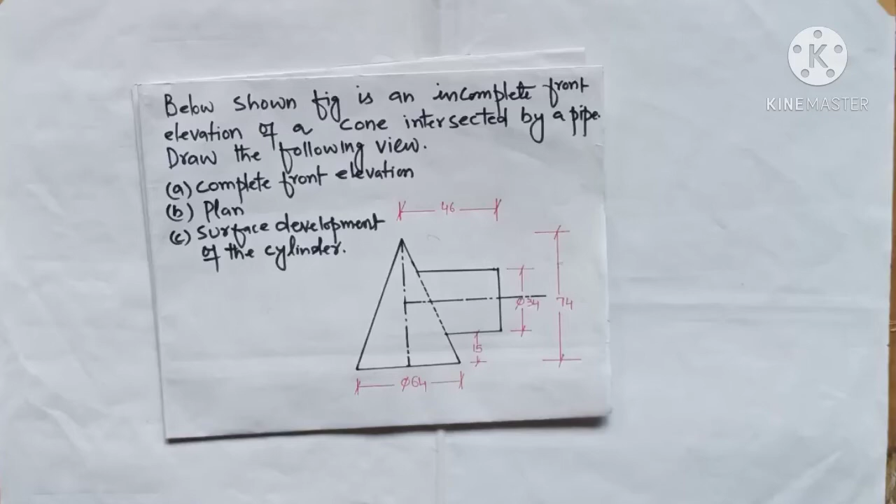So shown below is an incomplete front elevation of a cone. So this is the incomplete front elevation of a cone intersected by a pipe. So this portion is the pipe part which is intersected with the cone, and we have to draw the complete front elevation.

So we have to complete the front elevation, and the plan, that is the top view, we have to draw of this figure, and we also have to do the surface development of the cylinder. So we have to develop this cylindrical portion of the diagram. So this question is the combination of projection of solids and the development of surfaces. So let's start doing the question.

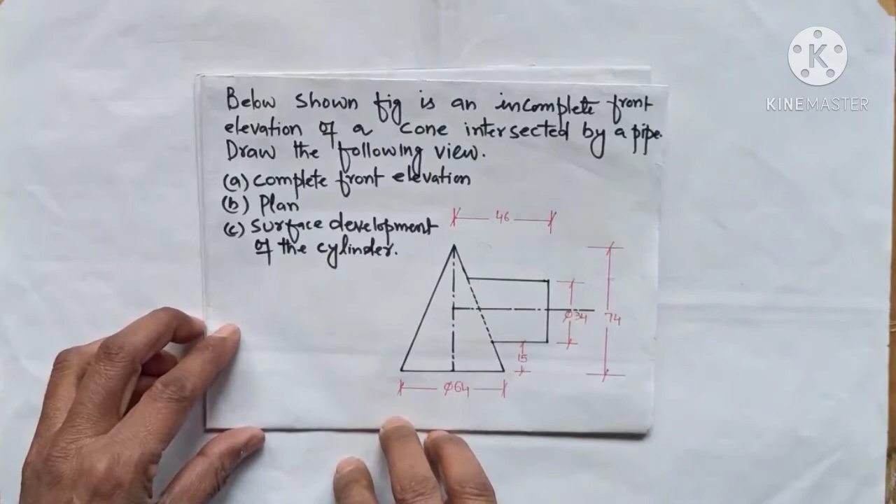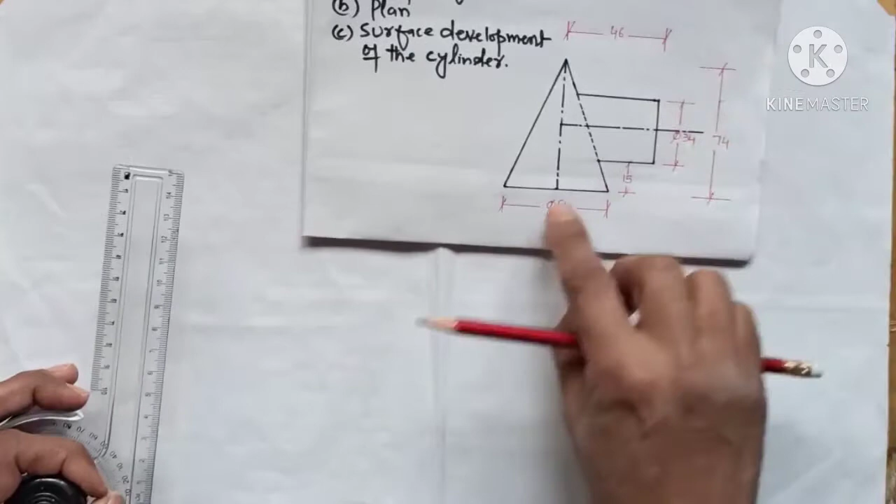So first I will draw the given figure again on this drawing sheet, then I will draw the top view of the diagram, then the last part will be drawn. So let's start drawing the first part. So as you know, this cone has a base circle, that is its base is 64 mm, having the dia of 64 mm.

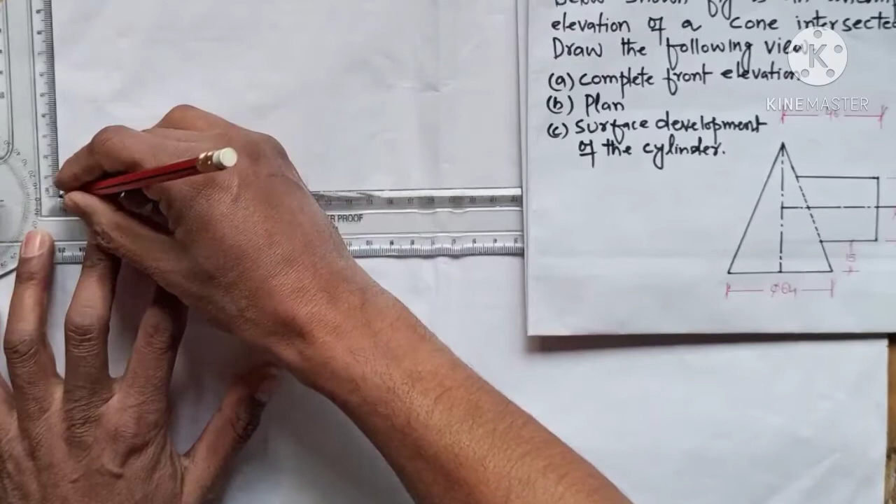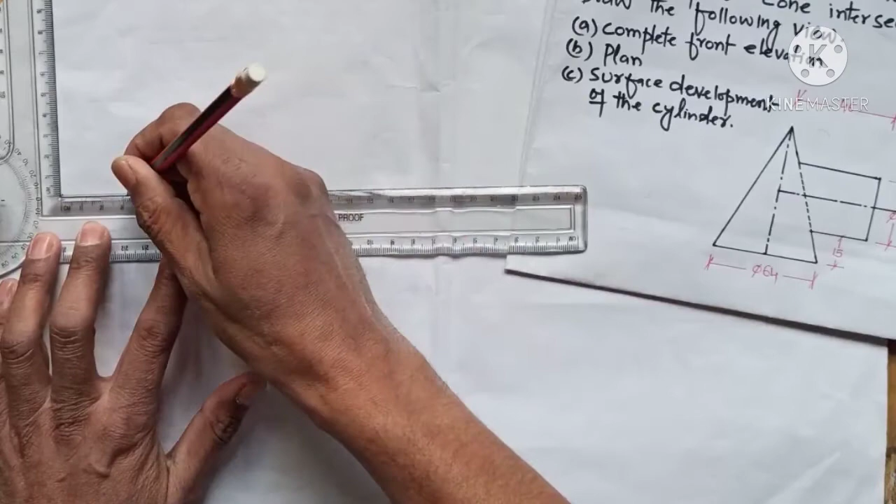So I will draw the 64 mm dia here. So 64 is this much. So I will draw a line. That line should be a very light line, my dear students. So I draw the 64 mm base of the cone. Then I will bisect it. So that is 32, this is the bisecting point. On the bisecting point, I will draw the axis of the cone.

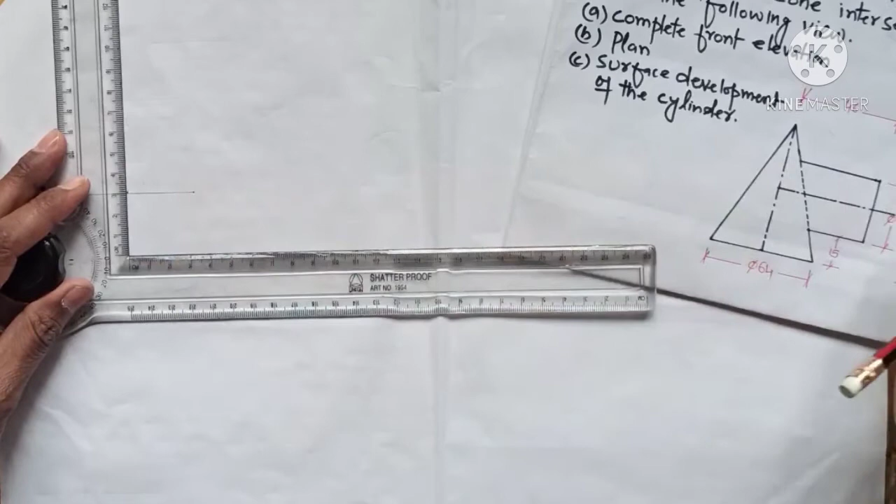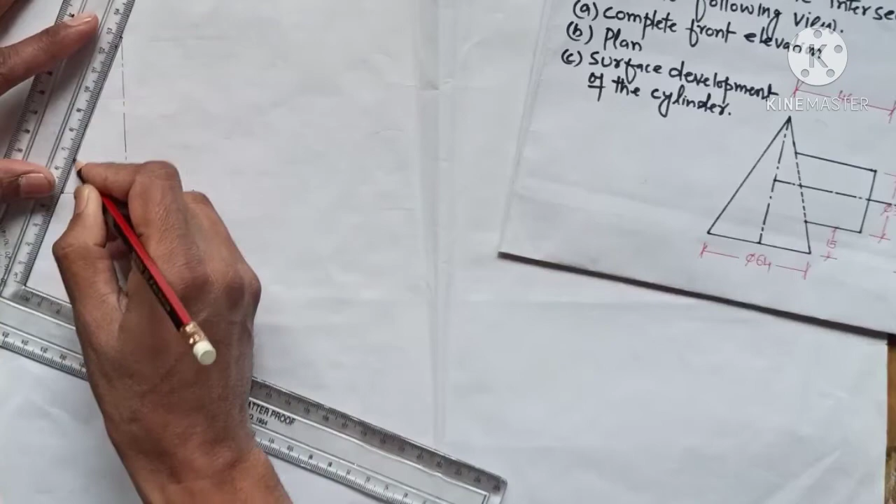That axis is how much? It has a height of 74 mm. So it is 10, 20, 30, 40, 50, 60, 70 and 74. So I will draw the central axis of the cone. Now next I need to connect these points with the apex with a light line initially. Again this needs to be connected with a light line initially.

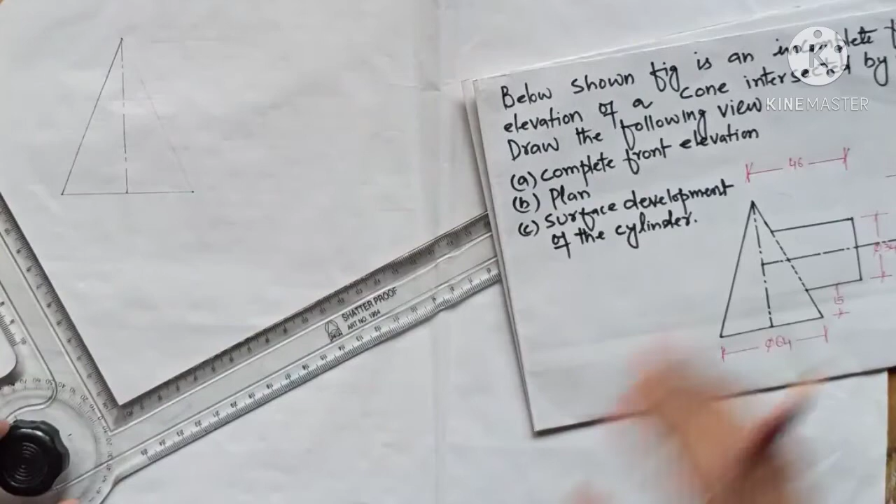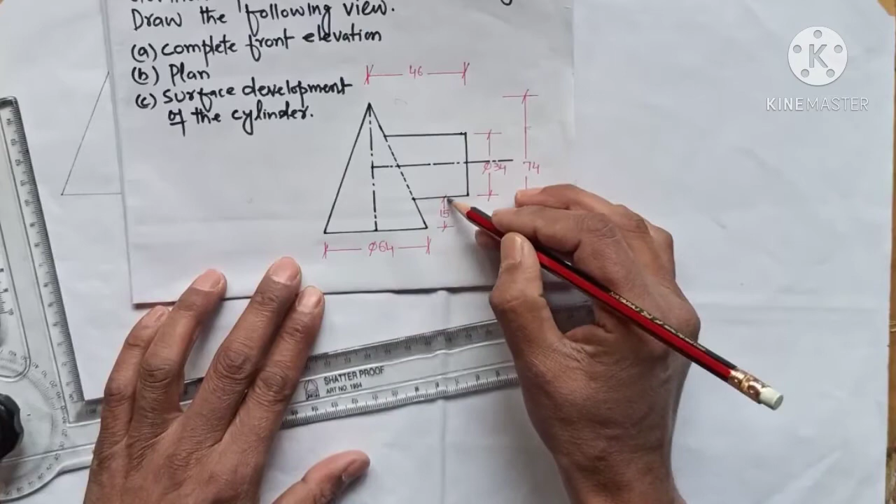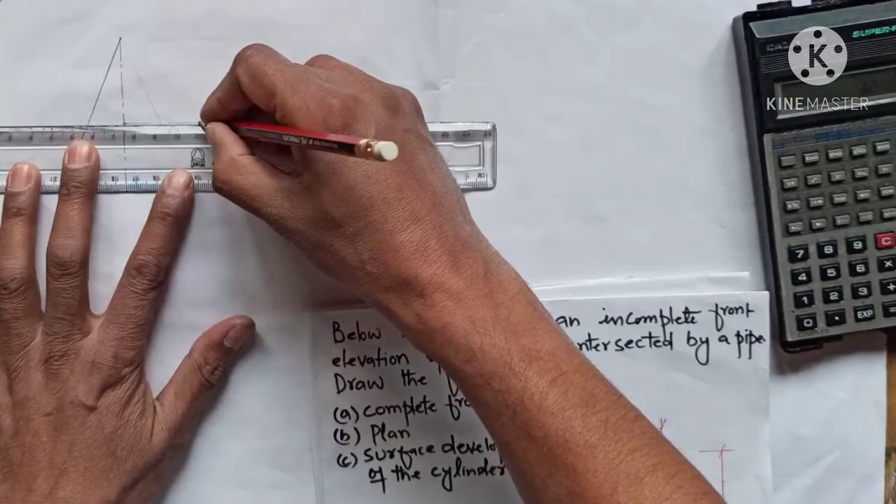Next I need to find out the center of this pipe, which is the cylinder. So it is half of this, that is 34 by 2, that is 17, plus 15, that is at a height of 32 mm. So from the base of the cone, I have to go 32 mm up. So this is the center. So I will draw a central axis of the pipe.

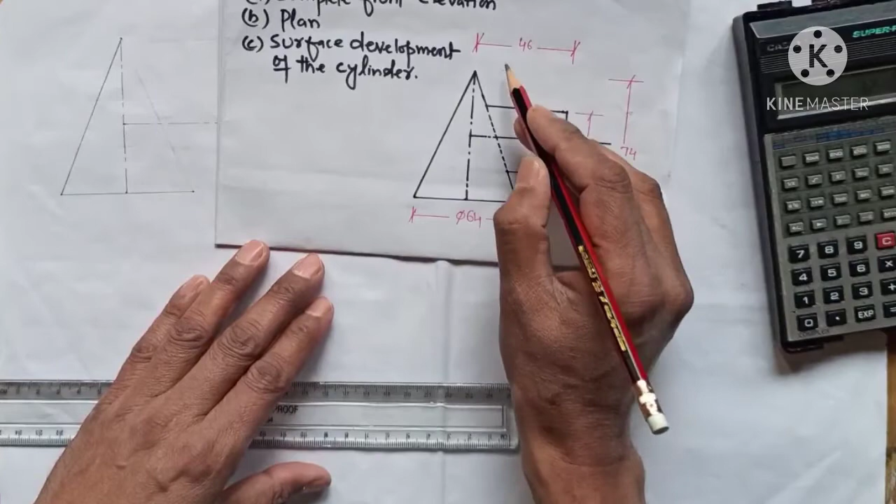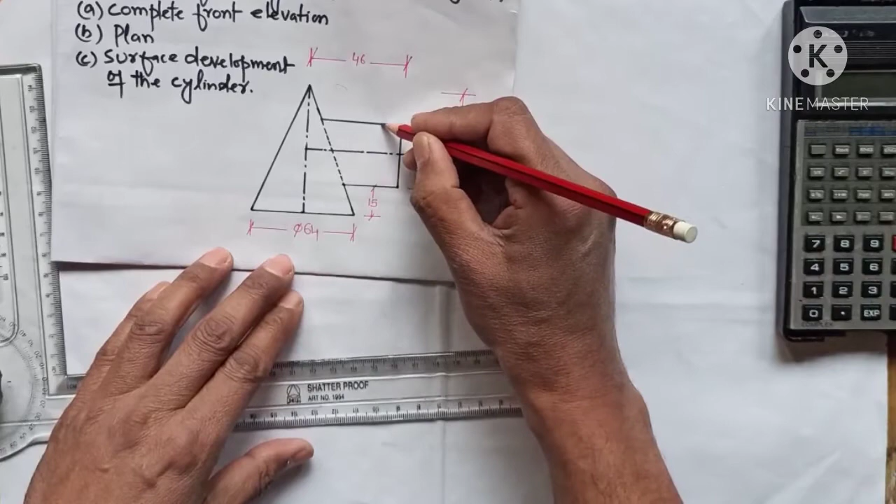Next, this is at a distance of 46 mm from the center. So I will measure 46 from here, it is this point. There I will draw a light line. And now the dia of this pipe is 34, that means 17 mm above and 17 mm below. So I will mark the 2 points on this line, 17 mm, this point, and here it is this point.

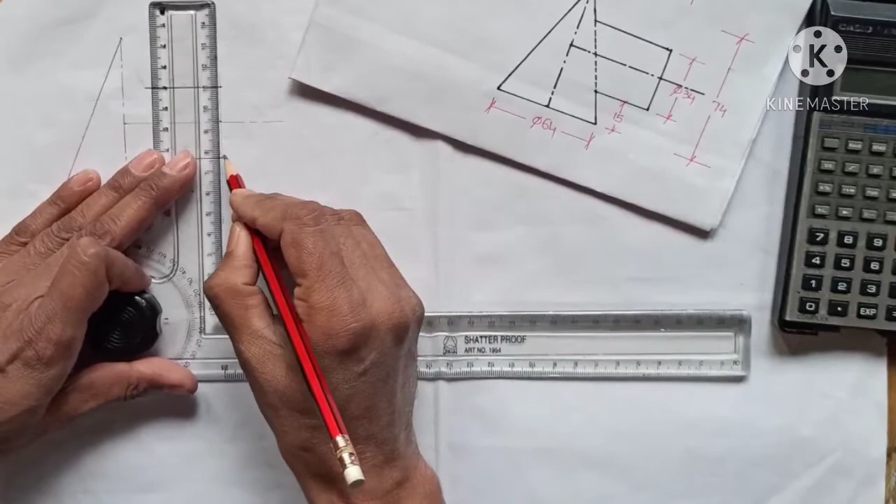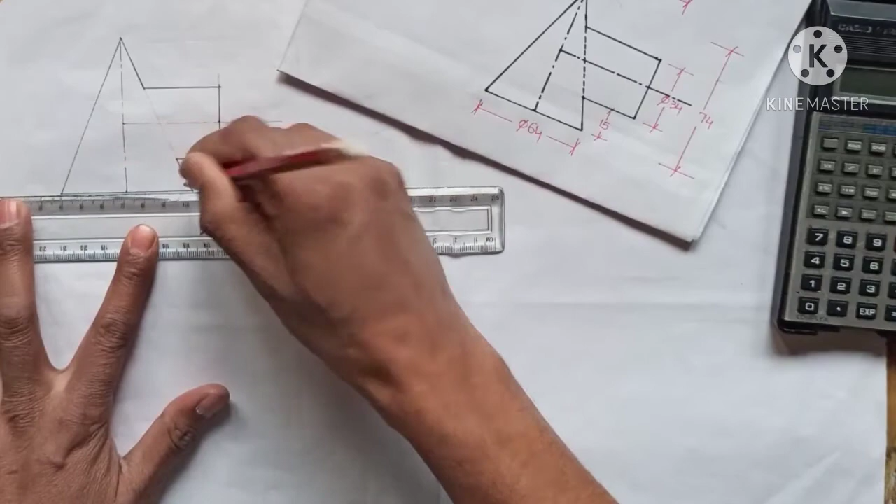Then join these points with the slant generator of the cone. Now the rest of the part can be made dark. I can make this dark, and join this as a dark line and this as a dark line. Okay, this is what was given in the figure, and as I said, this is the incomplete one.

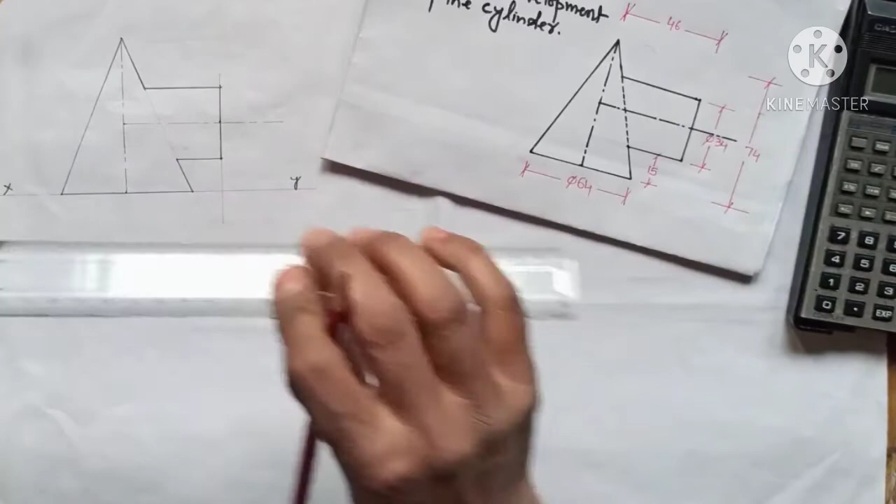So let's assume that this cone is resting on the ground, that ground is my xy line, so I will now draw the xy line. Now from the front elevation, I will draw the plan of it. For the plan, I will extend this central axis. Then I will draw a horizontal line on the central axis that will indicate the center. So I found out the center of the base.

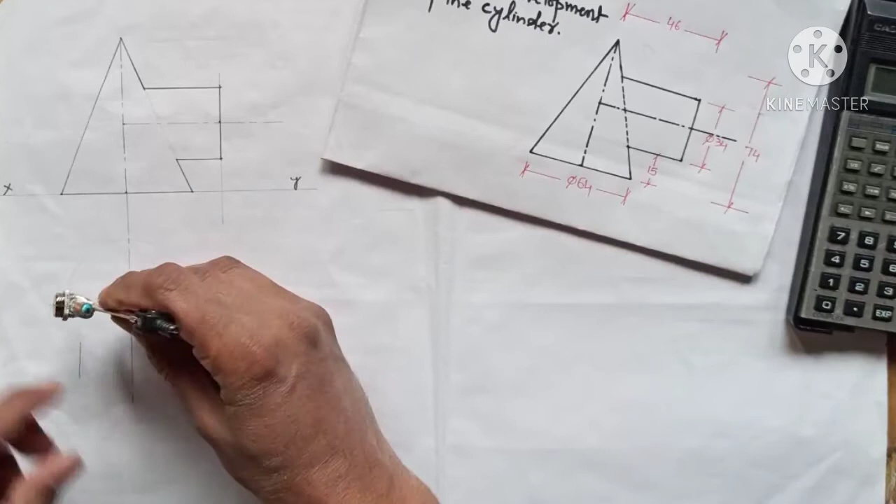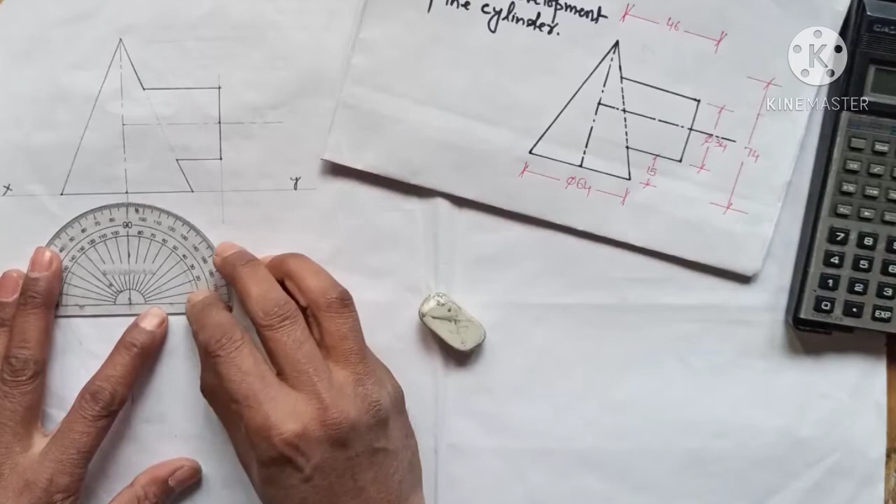Now I will measure here, this is half of the base. With this as center, I will draw a light circle. And this circle needs to be divided into 12 equal parts. Already 4 parts are there. So I will divide this circle into 12 equal parts, keeping the protractor at the center, giving points at 30 degrees, then 60, 90, 120, and 150.

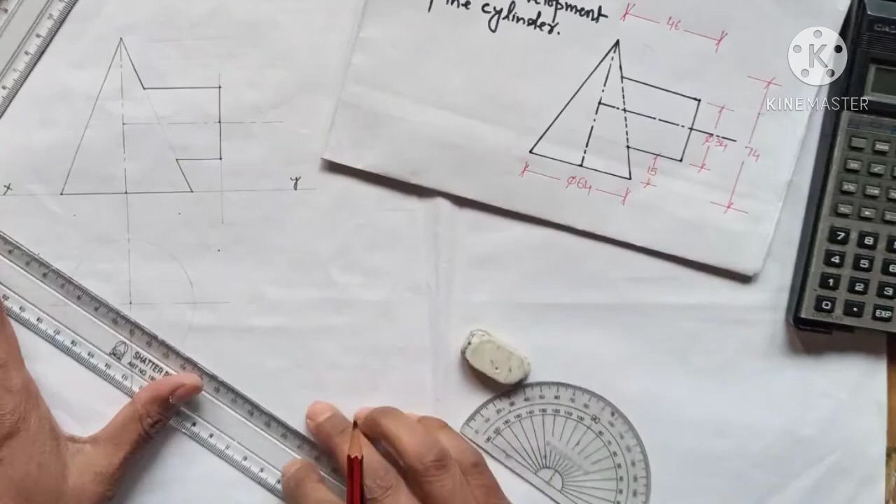So I'm dividing the base of the cone into 12 equal parts. Now joining this point and the center of the circle with a very light line. Same goes for the other points. Now these points need to be joined.

With a very light line. These are all construction lines, my dear students. This is how I have divided the base of the cone into 12 equal parts. So now naming them. Let's say this is 1, 2, 3, 4, 5, 6, 7, 8, 9, 10, 11, and this one is 12.

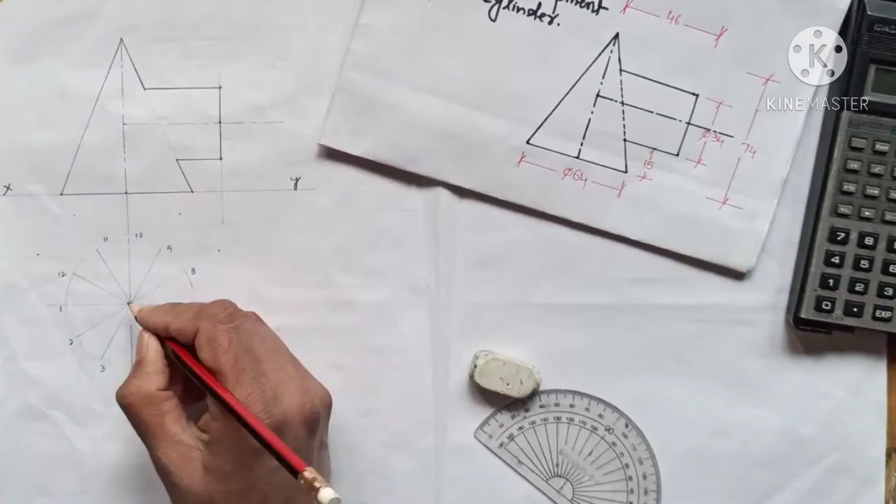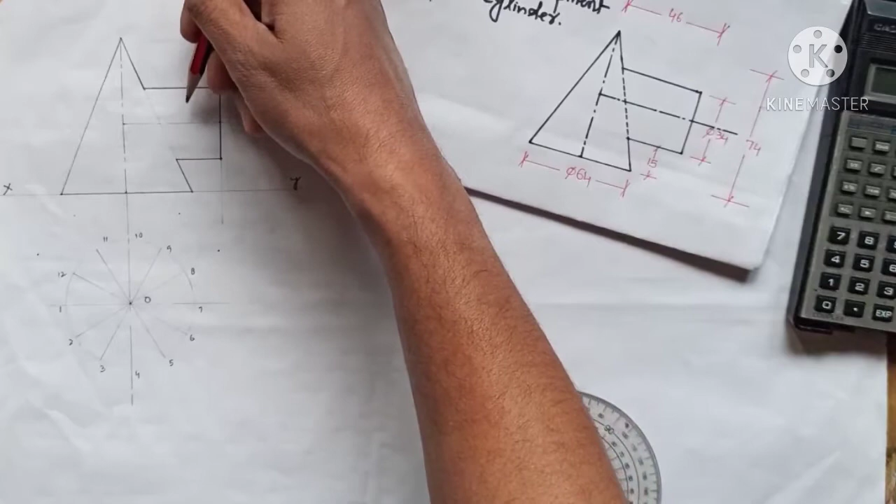What next? When I look at it from the top, I can find this apex. Let's assume this apex is 0. Fine. And when I look at it from the top, I can see this cylinder, having the dia of 34, which was given in the diagram. So what I have to do, I will produce this point with a very light line.

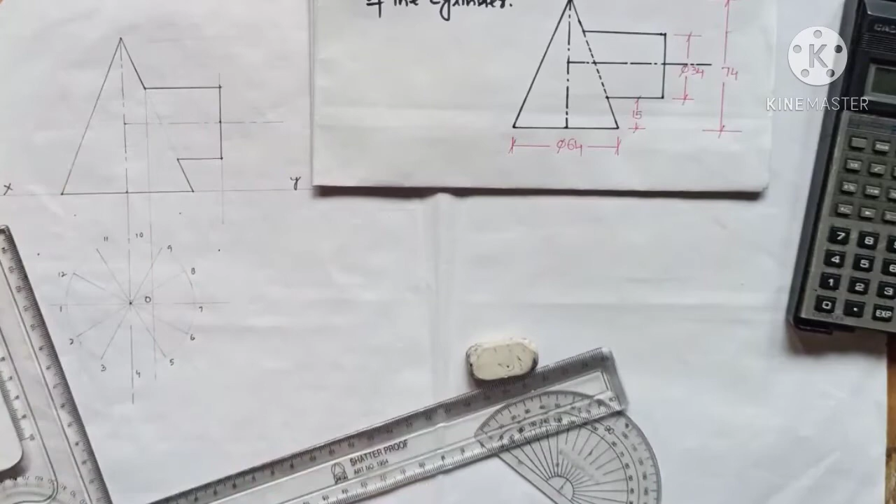Now next, I can also produce this point, the other end of the cylinder. Now let's assume this is the center of the cylinder or the pipe, and the dia of that is 34. That means we have to mark 17 mm above this line and 17 mm below this line in the front elevation. Fine. Now joining these points with a dark line up to this point.

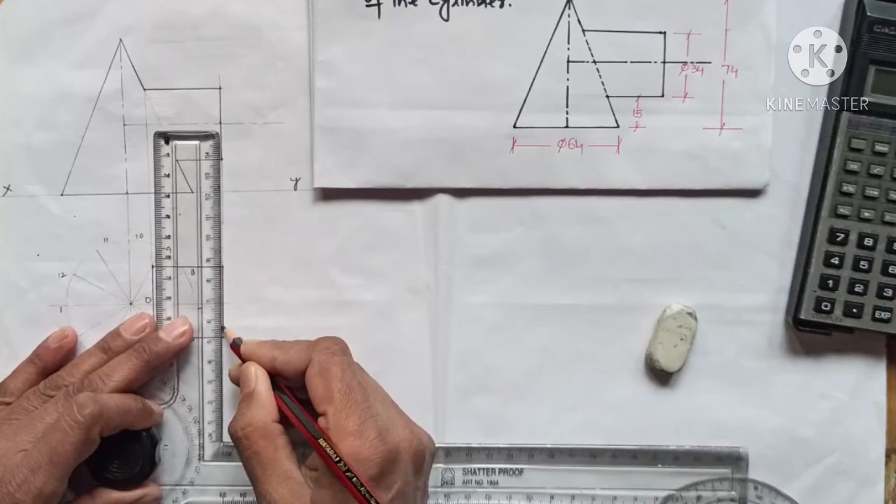Again this goes with a dark line. And joining this one also goes dark. And this one also goes as dark. Now what else I need to do? I will make a semicircle with a radius of 17 mm. So keeping this as a center, I will draw a very light semicircle.

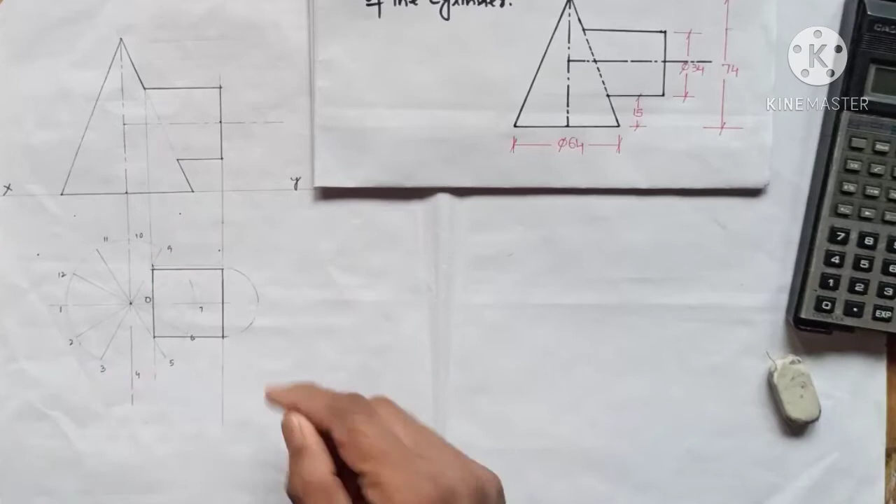Fine. Because I need to divide this cylinder into 12 equal parts, I will divide this semicircle, assuming that semicircle is the base of the cylinder, into 6 equal parts. I will keep the protractor here and divide this at 30 degrees, 60, 90. This is my 120 and this is my 150.

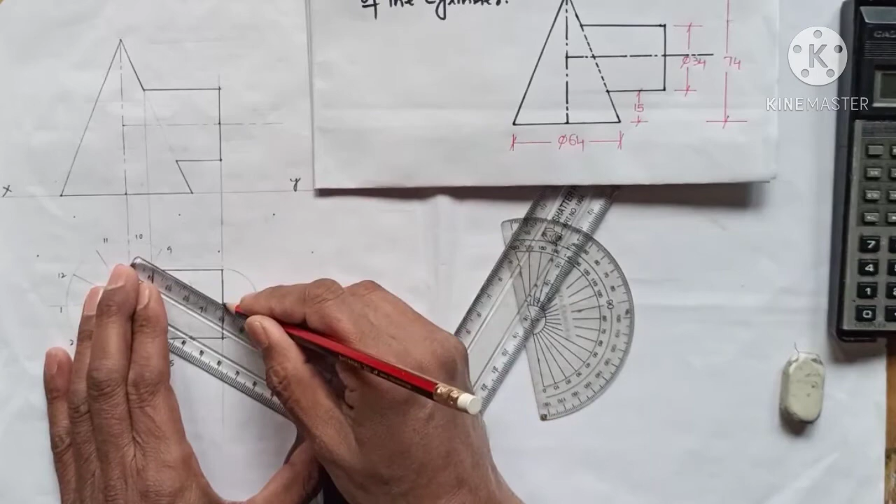And joining these points with a light line, with a light line, and with a light line. And then this way.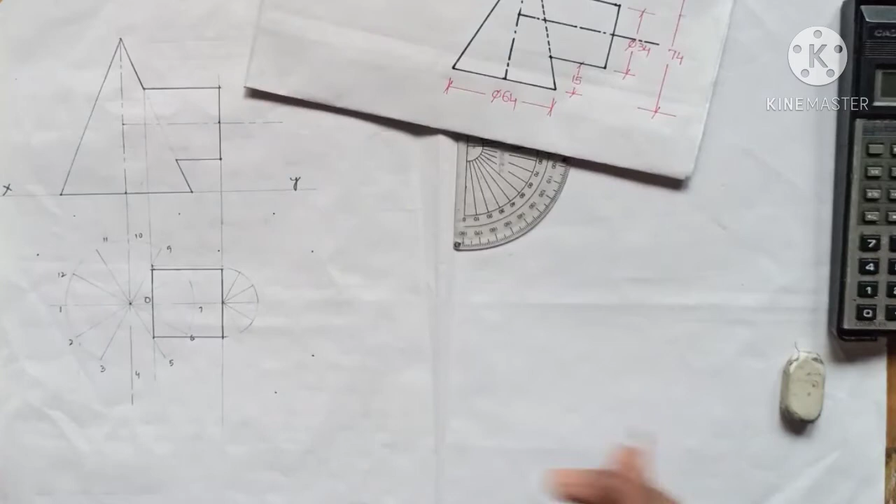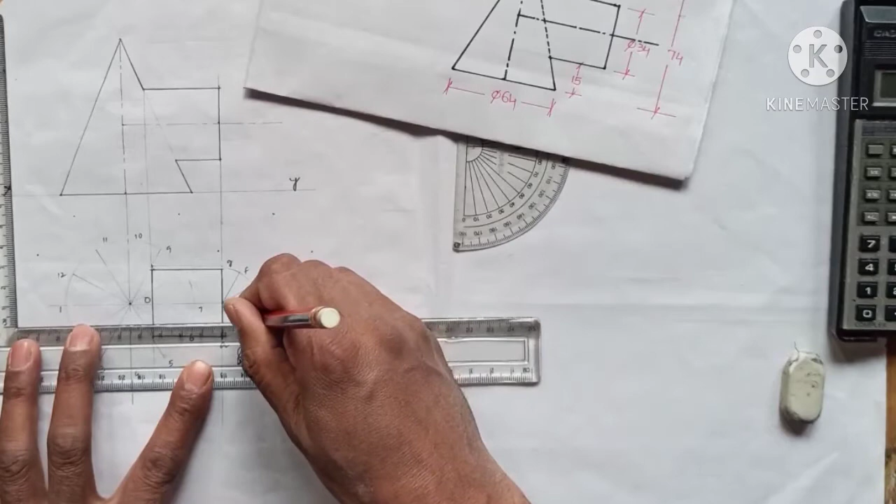Okay, now I will just mention their names. Let's call this A, this is B, C, D, E, F, and this is my G. Next is producing these points as horizontal lines, parallel to this base. So I will produce this line with a very light line. Again, this is a construction line, it should not be darker. This has been already produced. Then I produce this point up to this point, and the last one is this one.

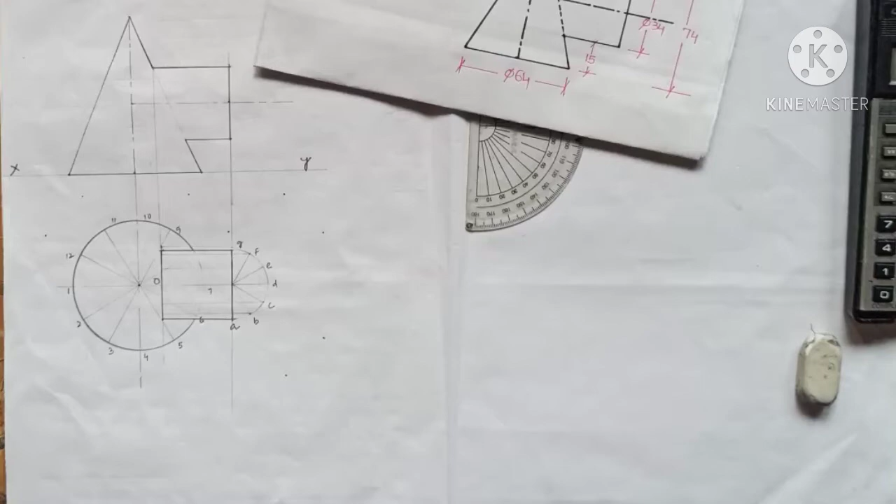Okay, now what needs to be done next? I will make this portion darker now, this base of the cone, only up to this portion. The rest, when I look at it from the top, I can see this line. So this is indicating this line. So this rim cannot be seen.

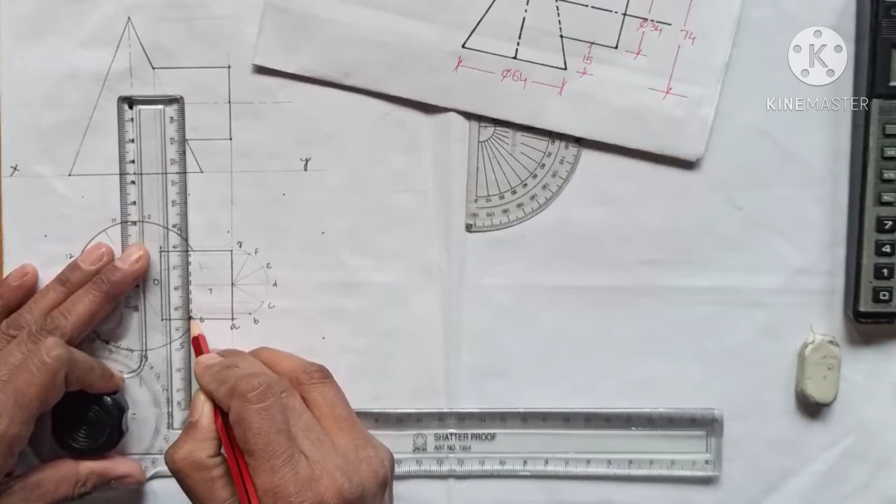So if I produce this, this can be seen as a hidden line, so I'll represent it as a dotted line. Fine, and this circle needs to be rubbed off because it cannot be seen. So I will rub this portion. So my plan is complete. Now let's complete the front elevation.

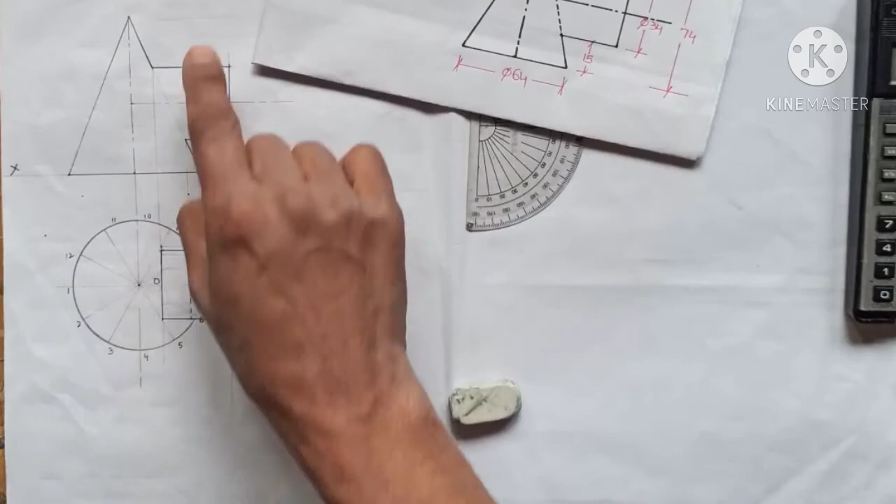To complete the front elevation, I need to produce these points up to the XY line, or the base of the cone. This point is already there. So I will produce this one along with this one, up to the base. That base is my XY, or we can call it ground because the cone is resting on the ground. This is already produced. So this point needs to be produced, this one and this one.

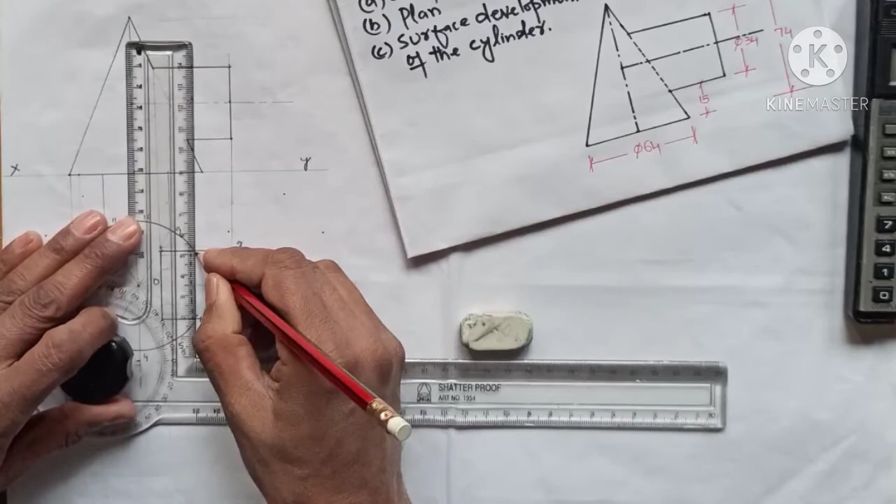And point 8 needs to be produced. This was the point 8 here. And the 7 has already been taken there, so it is already there. So let's name these points in the front view.

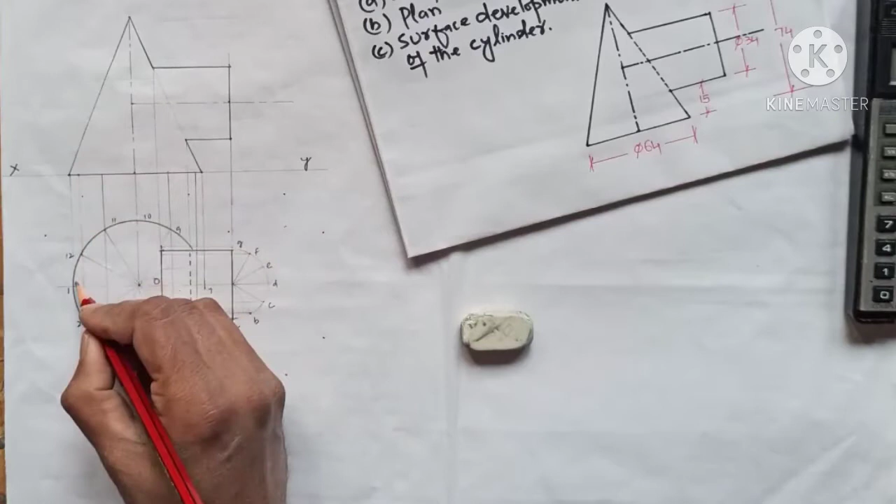As this is 1, this will be 1 prime here in the front view. This is 2 when we look at it from here. We can see only this half of the base and this half will be hidden. So it is 2, that is 2 prime, and behind 2 prime is 12 prime. So that will be in brackets.

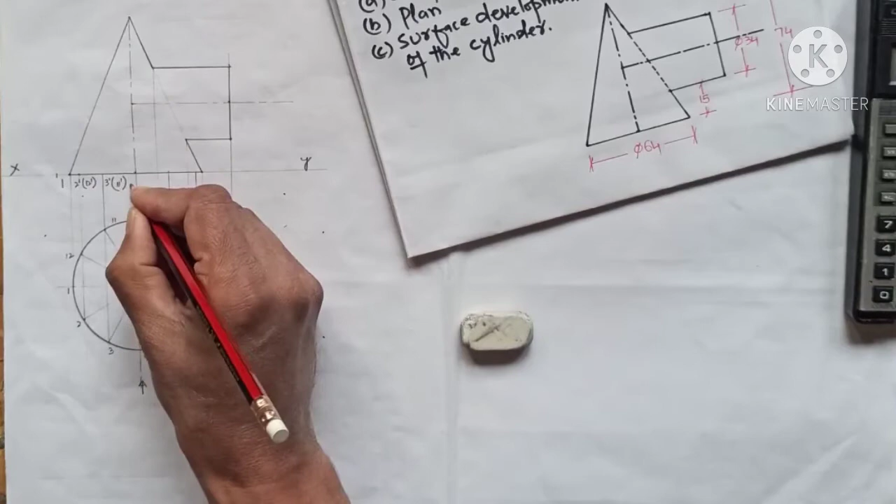Same goes for 3 prime, 11 prime, and 4 prime, 10 prime, and this is 5 prime, and 9 prime, this point is 6, and this was 8 prime, this is 6 and 8 prime, and this is 7 prime. Now what do I need to do next?

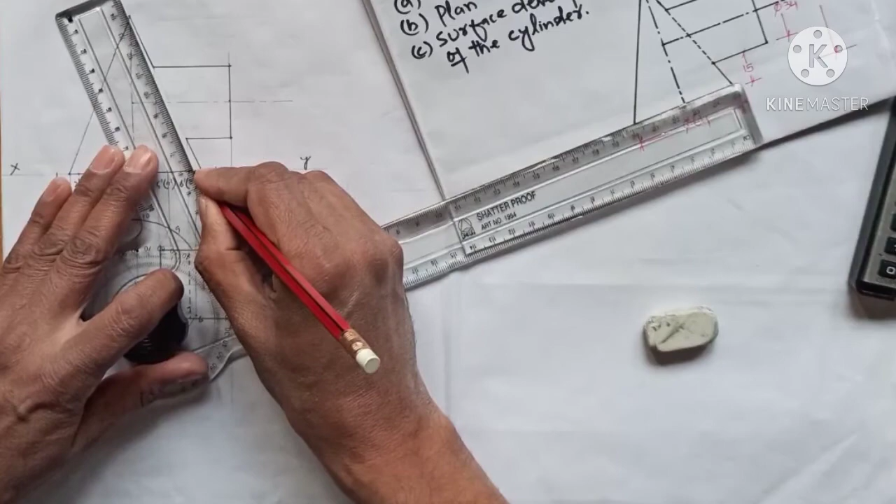I need to join these points; these are the generators basically. These are all generators, and I need to join these generators with the apex as they are connected here with the apex. So I will take all these points up to the apex with a very light line. Remember students, these are all construction lines. These should be very light.

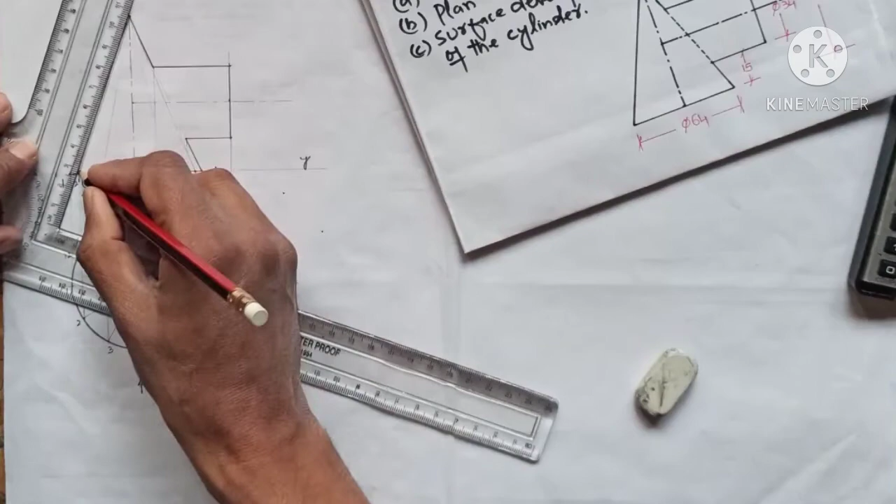Again, this point goes up with a very light line. This is already there, so let me take this one there with a very light line, and now goes this point. This one should be darker, so I need to connect this line to this point with a dark line.

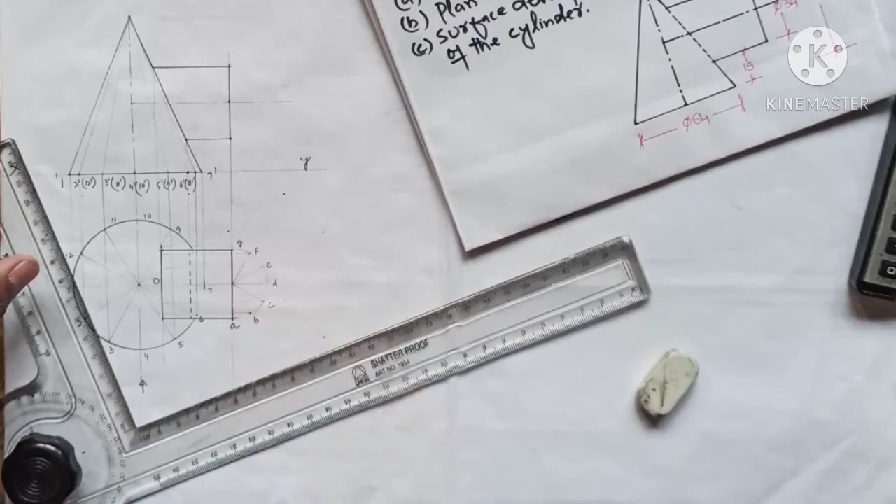Now, as we have divided this one here, this should also be divided in equal parts as here. I can do it either with a compass, or you can use the scale. So let me use the compass to divide this line. So this is this one. The next is on the other side. It will be almost the same. Then goes to the next point.

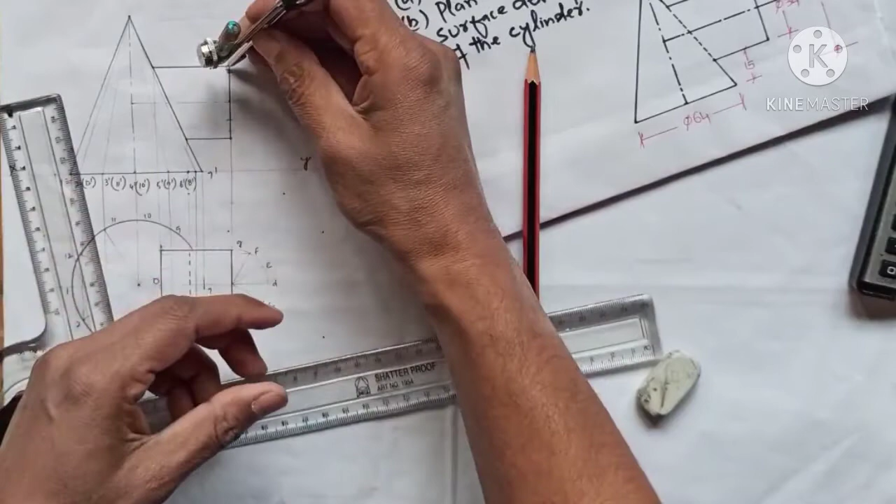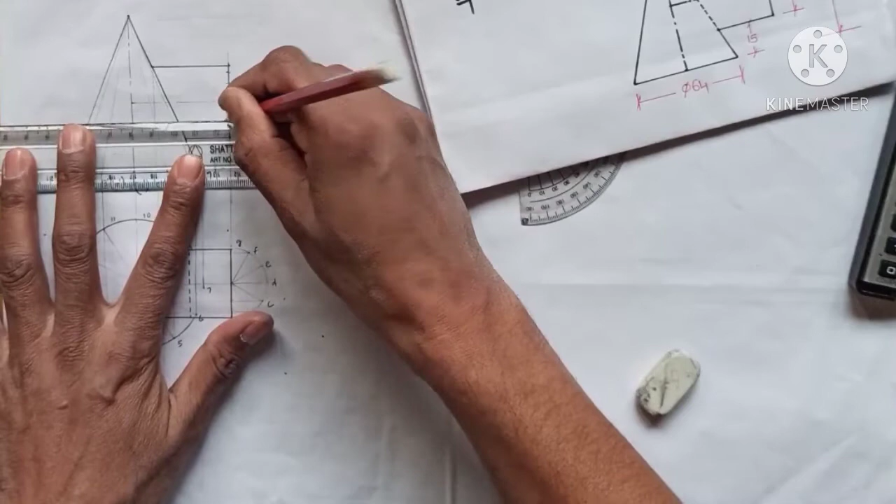Keeping one leg at A and another at the other point. So this is one point, and keeping one leg here and cutting this line. Now I will join these points with the slant edge of the cone with very light lines, my dear students. Again this point with a horizontal line. See, this is already joined, so I need not join this. Light line. These are all construction lines.

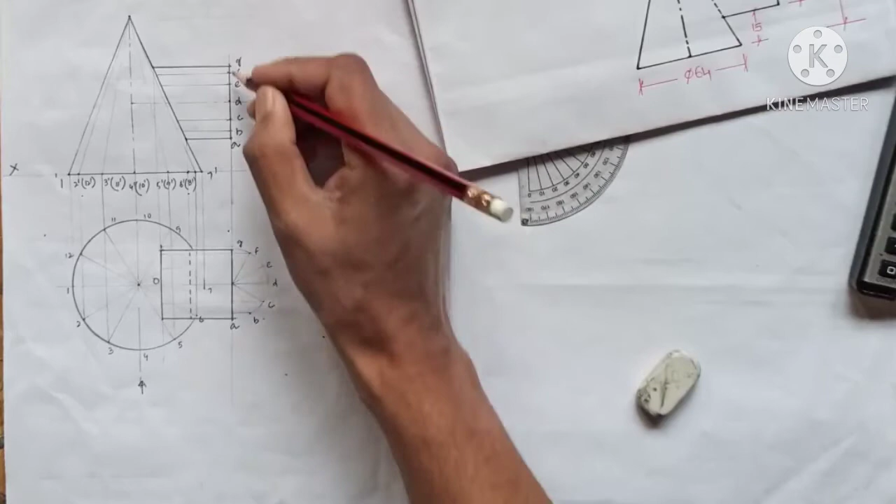Now you can even name them, because this was A and this is my B, C, D, E, F, G. Let's keep these names only initially. I will tell you how we can do the rest of the part. So this way my plan and the incomplete front elevation is now complete. This is the first part of the question which we have completed. Now for the next part, that is the developmental part.

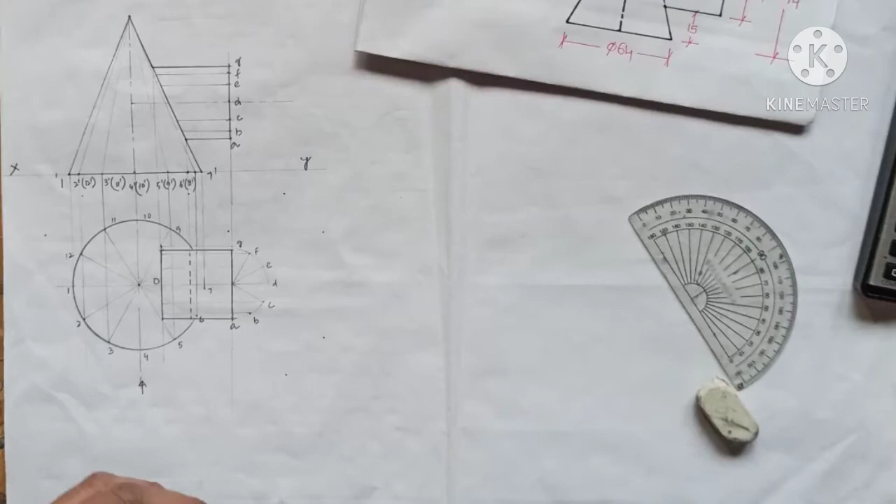Let's now do the third part of the question, that is the surface development of the cylinder. Now we have to assume this as the cylinder, so I will draw this separately for the development. As I know, the diameter of that cylinder is 34 mm, given in the question, my dear students. So I will draw a line of 34 mm. From this point to this point is 34 mm. So I will draw the base of that cylinder.

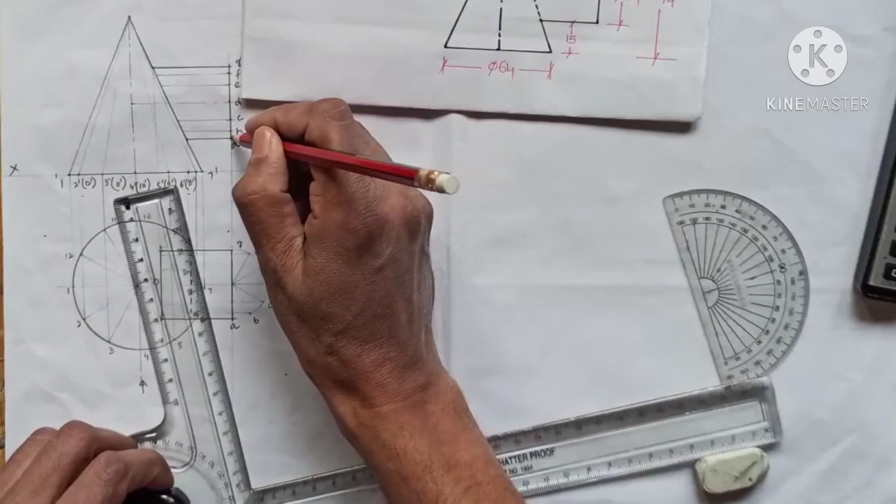Now this is the minimum height of the cylinder and this is the maximum height of the cylinder. Let's take the minimum height. I will measure the height from this point to this point, that is 21 mm approximately. So I will take this as the vertical height, 21 mm, and draw the vertical line up to this point.

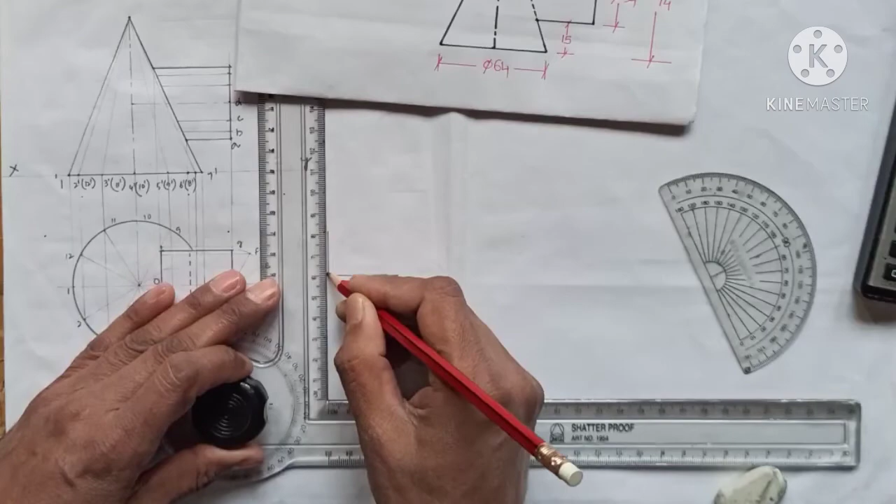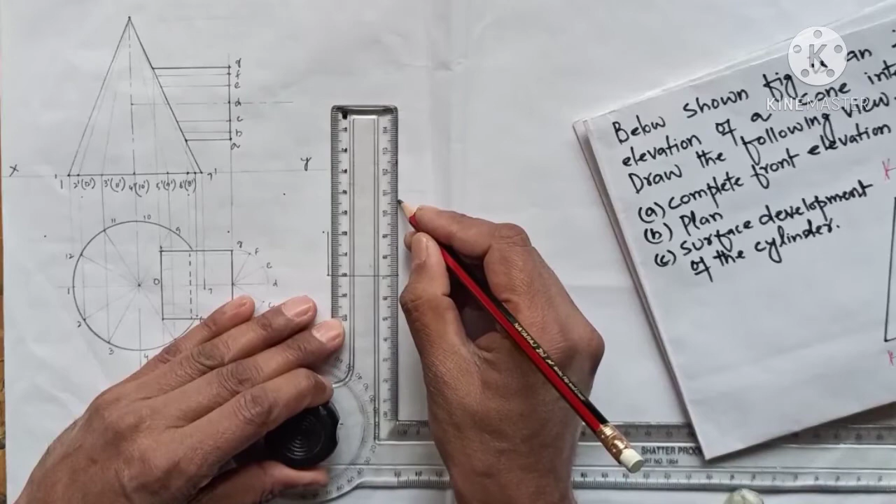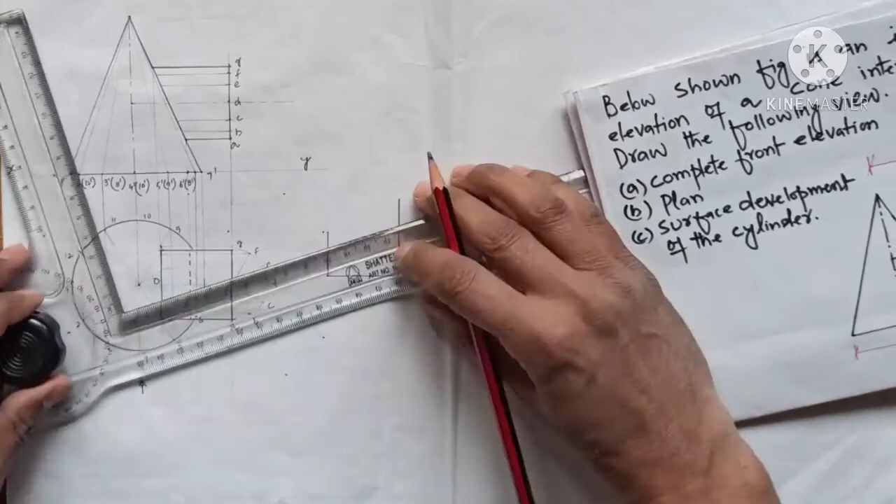Same way, this is the maximum height of that cylinder. It is 36 mm. So on the other side I will measure 36 mm. This is the 36 mm on the other side. Now this is the truncated part of that cylinder, so I will join this and this one, and it becomes the truncated cylinder.

This is the first thing I need to do. I have kept this part at the ground and drawn the truncated cylinder because I have to do the development of it. Now for the rest of the parts, I know this distance. It was the diameter, which was 34 and given. Let's assume it was in mm, and we know the circumference.

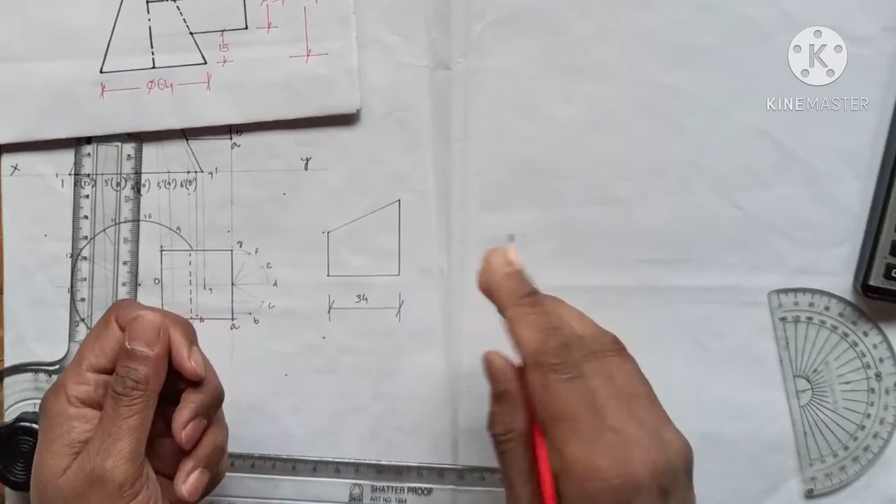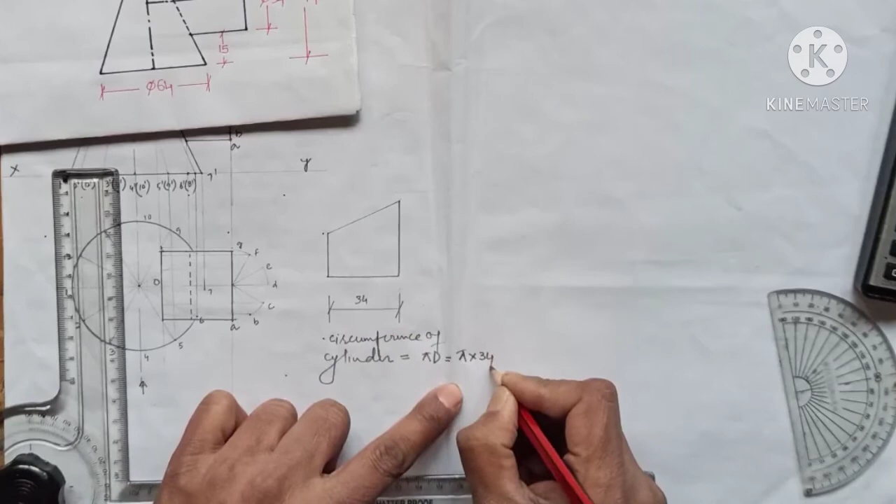Now we have to open up this truncated cylinder, and the formula for that is the circumference of the cylinder. So circumference of cylinder, that is pi d. So d here is 34, that is the diameter. So if we calculate pi into 34,

that is 106.81. Let's do 7, 10, 20, 30. So let's do it this way, 100, and it is 107. So I will draw a dark line.

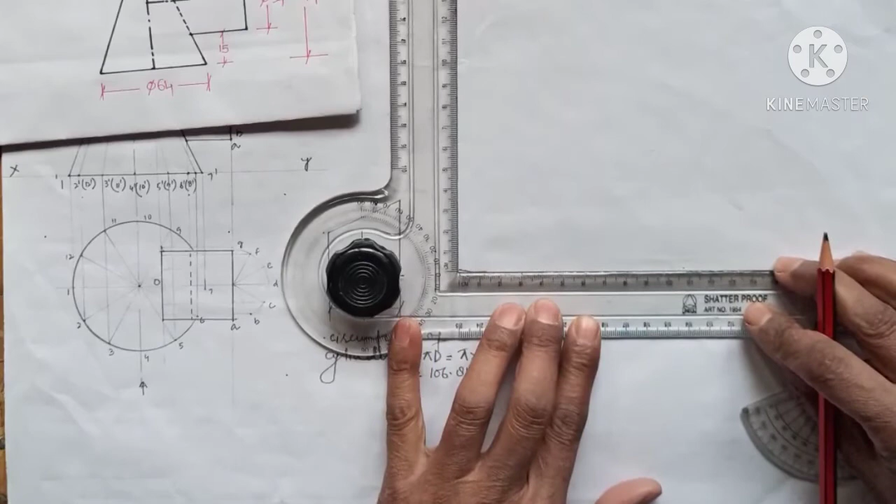I will draw a dark line. Okay, now next what I need to do, we have to divide this line. So assume we know this: the smaller end was A, and this was G, the larger end. Fine. And we have divided this into 12 equal parts. So we know this end is A and this end is also A, because we are opening A. We are cutting at A, and G will be at the center.

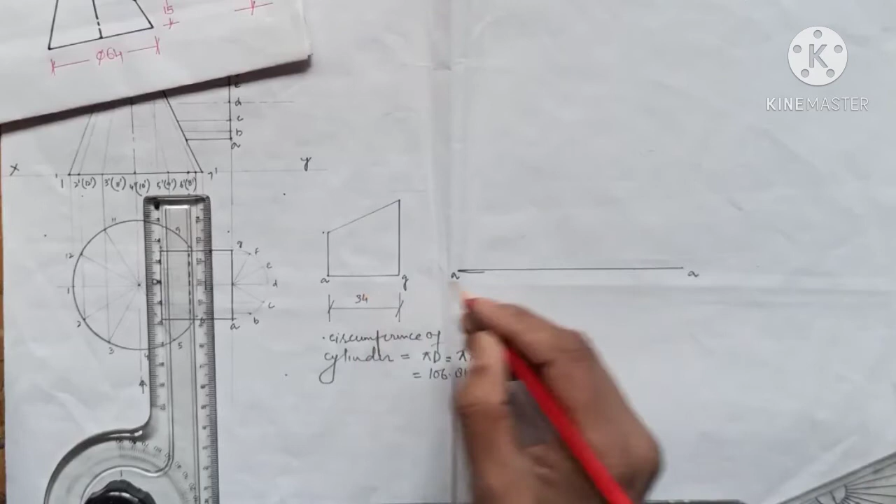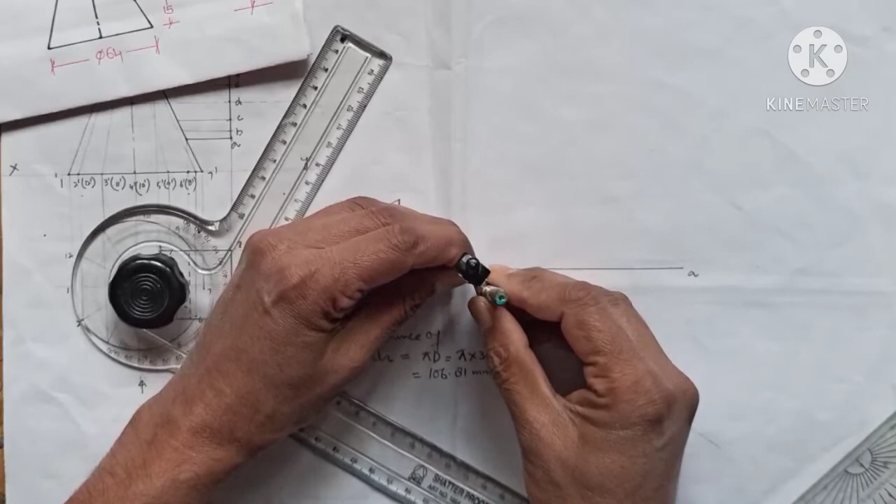So we have to divide this line into 12 equal parts. For that, we have to draw a construction line, an inclined line at any angle of your choice. Then we have to cut this inclined line into 12 equal parts. So without any measurements, I'll keep one leg of the compass here and start cutting this line into 12 equal parts. That's 1, 2, 3.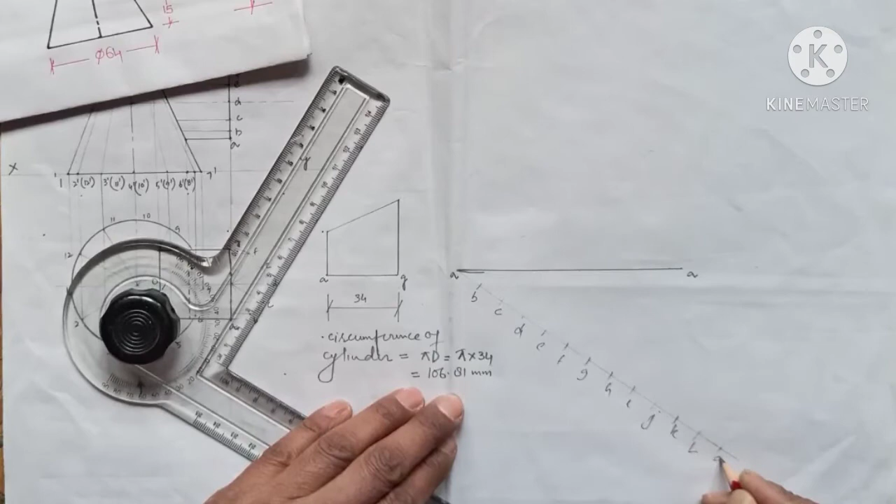So let's name these A, B, C, D, E, F, G, H, I, J, K, L, and this is again A, because we are opening at the end, so it is A A. So what next do we need to do? We need to join the end of this inclined line with the end of this line. I will join with very light construction lines, my dear students, and now start drawing the parallel lines to these lines. Keeping the pencil here and drawing the parallel lines.

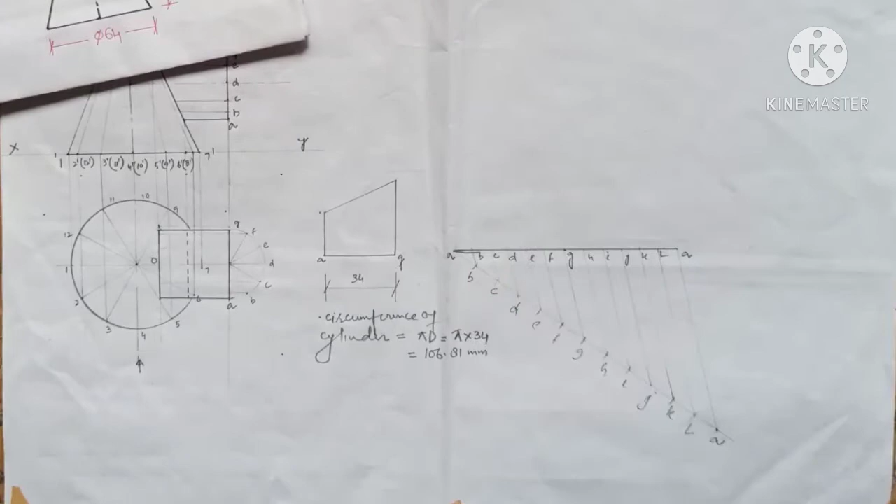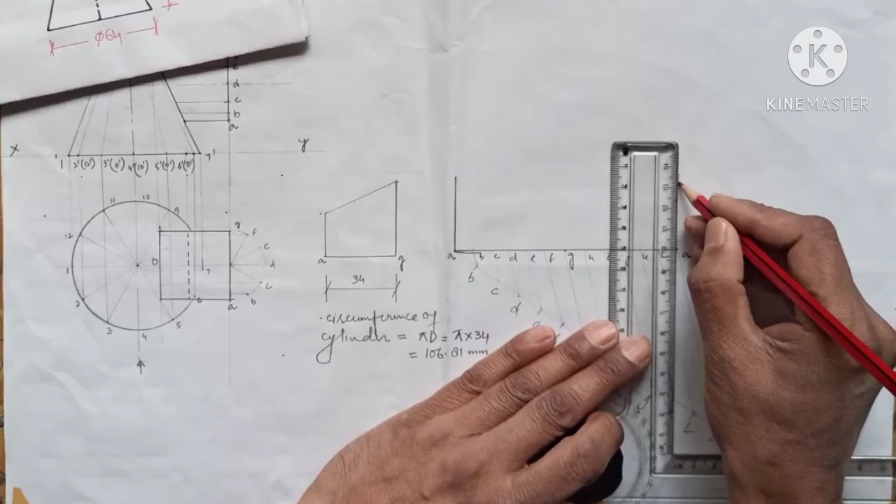So this way we have divided this line into 12 equal parts. So this is my B, C, D. As you know, the maximum height of the cylinder is how much? Let's measure this. The maximum height of the cylinder is 36 mm. So I will draw 36 mm from this A. I'll go up 36 mm and draw a line. Light, sorry, you can draw it light initially, then do the rest darker. So a 36 light line, then joining these, we got a rectangle.

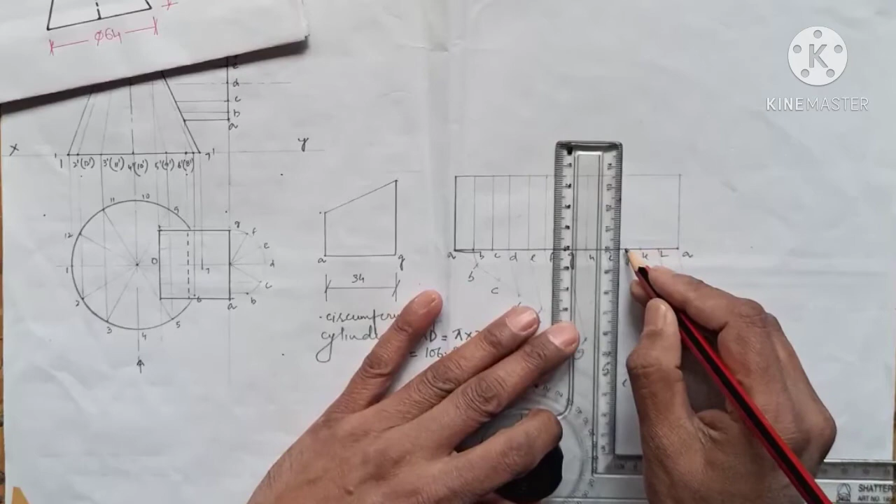Now we got a rectangle. These points go up to the top with light lines. These points go up one by one with light lines. Now this also has been taken care of.

Now we know this is a truncated cylinder. So we will go directly to this part, keep one leg of the compass at A and the other at this point, my dear students. So this is my A, and this is where I got the measurement from: the front elevation. Now I'll keep one leg here and cut this line, and the same goes here. Similarly for the other points.

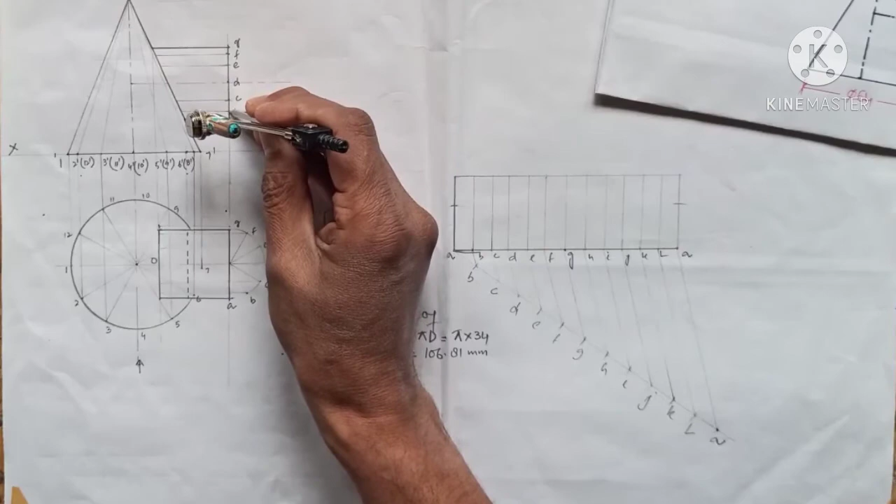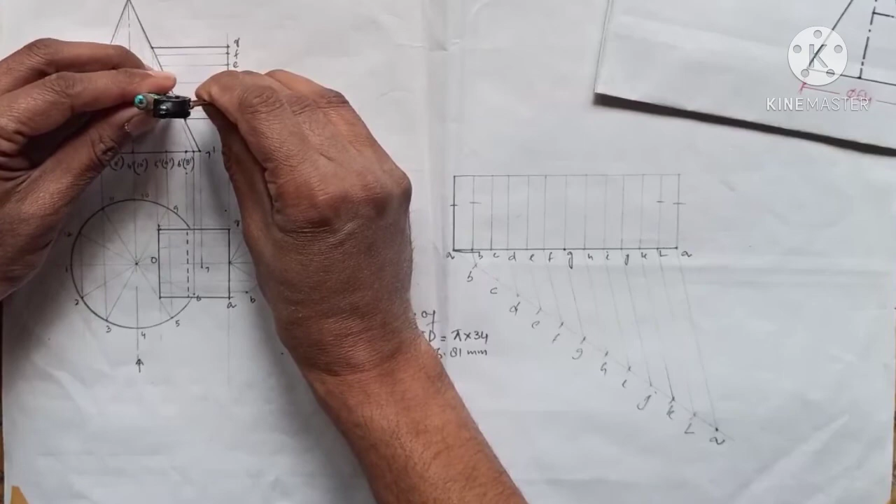Next I'll keep one leg of the compass at B and the other here, and take the measurement there. Now I'll keep one leg here and cut this point, and the same on the other side, because these are the two generators. Next at C, opening it up a little more. Again keeping it here, and then to the other side. Next is D, here and up to this point. D.

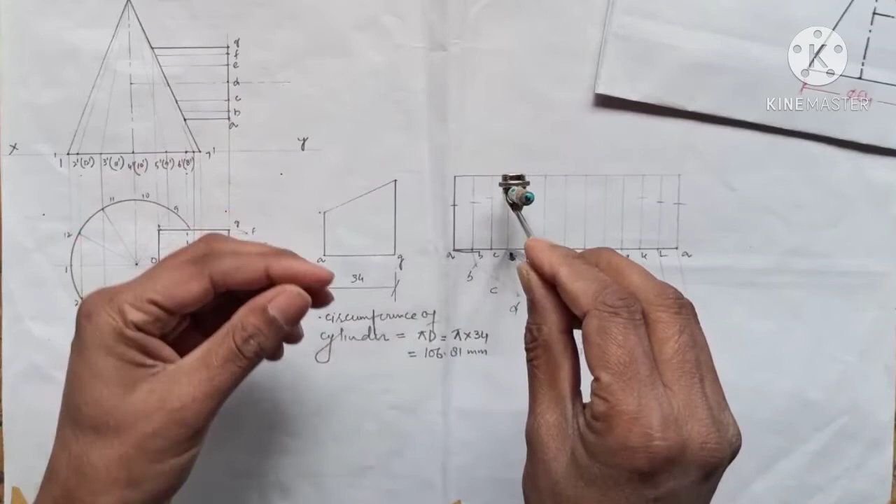I'm showing you the steps one by one, my dear students, for clarification, so you will not have any problem doing it yourself. So now at E, I have taken the measurement from there. Now I'll keep it here, and then next is F. At F it will be more open, then F here, the F1, and then G, and the last is G.

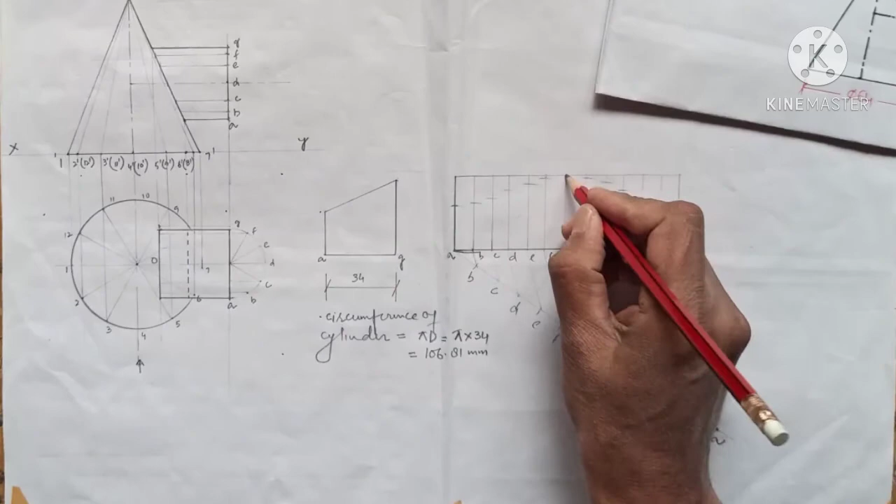That's the maximum height from this point to this point, which we have already taken, so this is this one point. Fine. So these are the various points which we got. Now we need to join these points with a freehand sketch. So let's join them freehand.

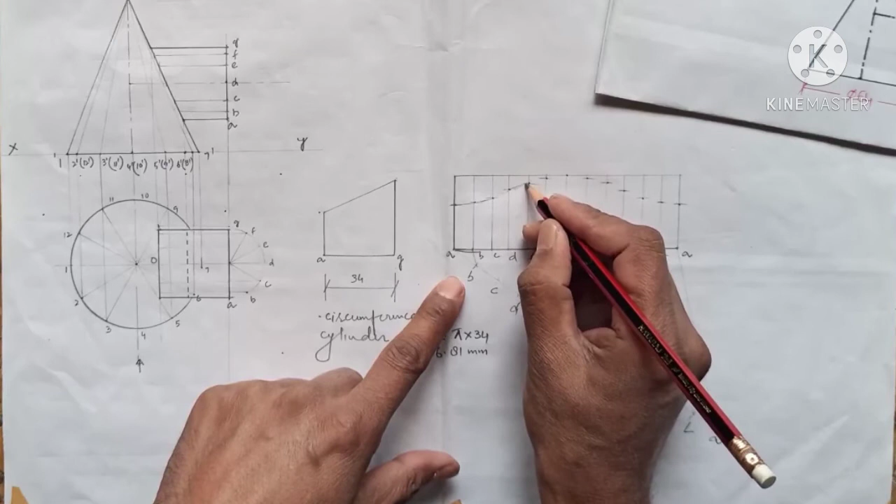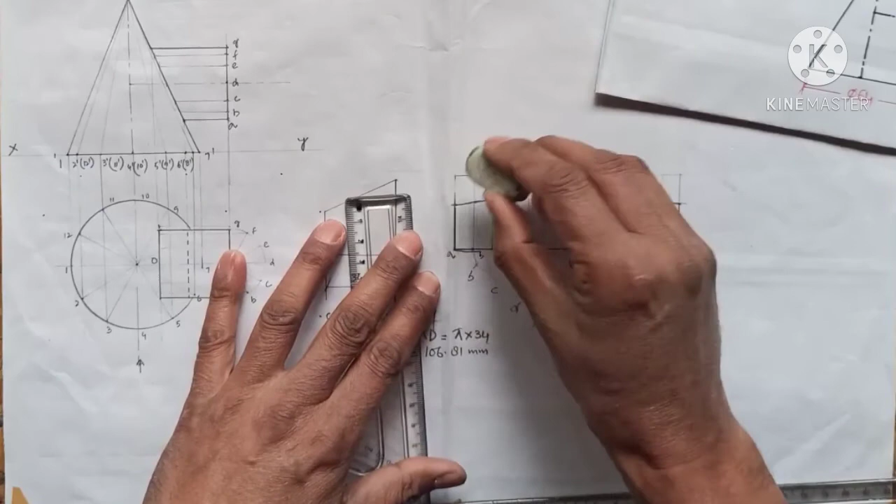Okay, now I can make them darker. So this is a dark line now. This is a dark line. This is also a dark line. And I will draw this now dark. And I need to rub this because I initially did this dark. So this is okay. This is my development of the cylinder.

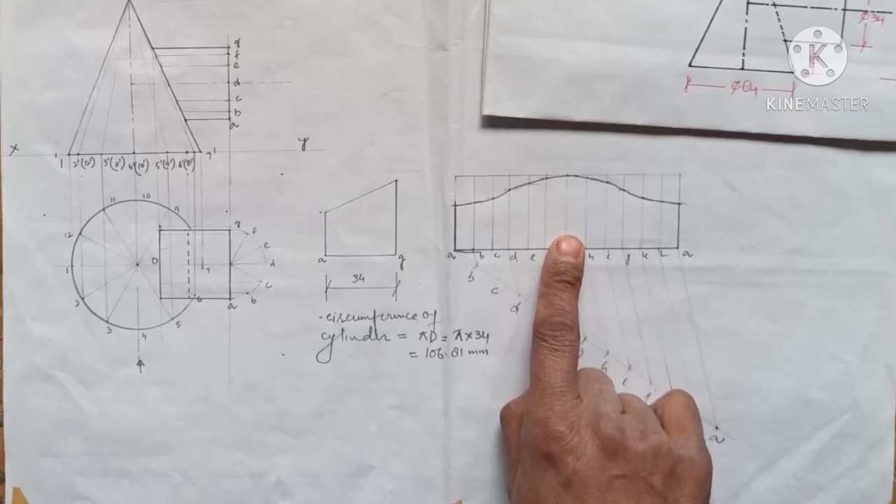So this is the front elevation, which was incomplete. I completed it by marking the various points, and the plan and the development of the cylindrical part only. So this is my front view, this is my top view, and this is my development.